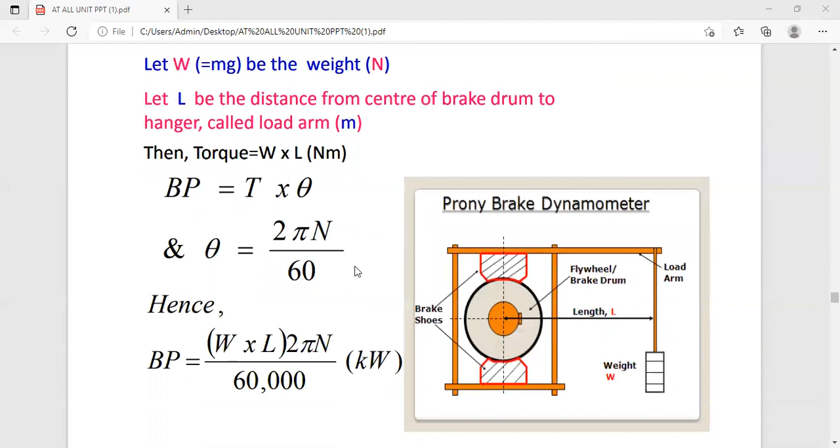When we calculate the brake power for the prony brake dynamometer, we take W equal to mg, where m is the mass on the load arm and g is the acceleration due to gravity. Let L be the distance from the center of the brake drum to the hanger, which is called the load arm.

So torque is equal to W into L. Keep in mind, W is the weight on the hanger in Newtons, and we calculate the torque as W into L, which is in Newton meters.

Brake power is equal to T into theta, where theta is 2 pi N divided by 60. So the overall formula for brake power is 2 pi N T divided by 60,000, where torque T is equal to W into L.

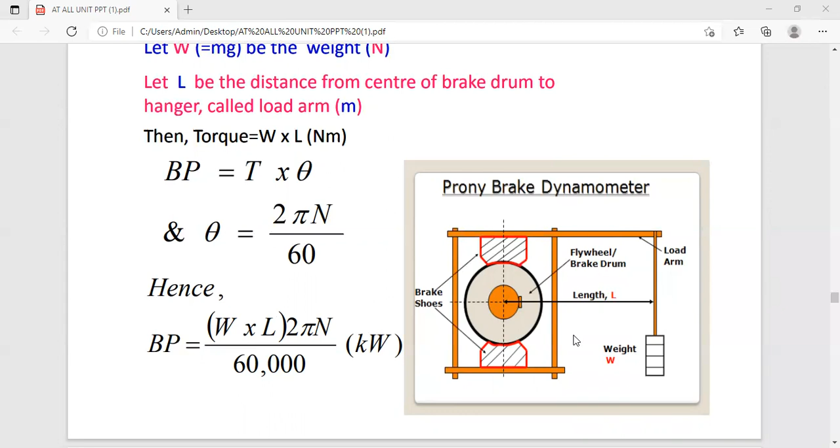W is the weight on the hanger, and L is the distance from the center of the flywheel to the load arm. In this way, we calculate the brake power using the prony brake dynamometer.

Next, we discuss the methods for calculating friction power. The difference between the indicated power and the brake power is called friction power, which includes pumping losses due to induction and exhaust, frictional losses in bearings and other moving parts, air friction of the flywheel, and power required to drive auxiliaries such as the governor, lubricating pump, and water circulating pump. So friction power equals indicated power minus brake power.

What effects can we observe due to this friction power? Frictional losses play an important role in deciding the performance and design of the engine.

As frictional losses increase, they reduce the availability of power output, increase the cooling load capacity since frictional power is converted into heat which is partly carried away by the cooling system and partly remains in the exhaust gases, increase the brake specific fuel consumption (BSFC), and decrease the mechanical efficiency. These are the effects of frictional power on IC engine performance.

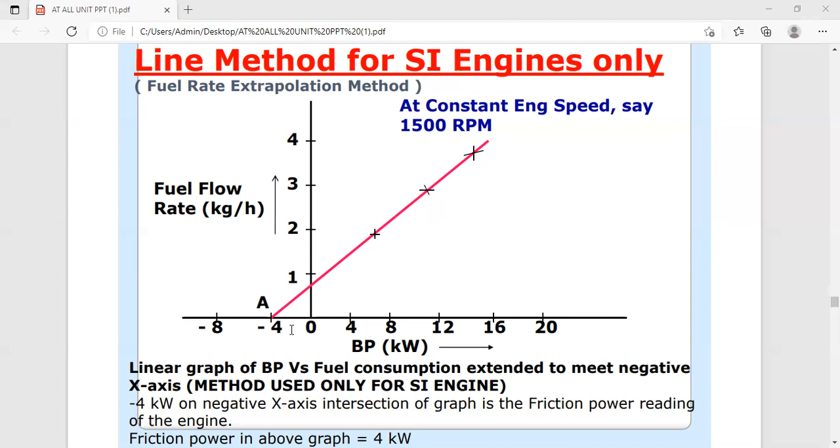When BP is equal to zero, the fuel consumption at this point represents the fuel consumed to overcome the frictional power. Since the variation in fuel consumption rate with brake power is linear, as observed in this graph, the extrapolation of the almost straight line part of the curve as a negative intercept on the x-axis, at zero fuel consumption, represents the friction power. In this graph, 0 to -4, so 4 kilowatt power is known as the friction power.

Now the limitations of this method: it is only applicable for the SI engine, meaning spark ignition engine. The engine must run at constant speed throughout the test performance, since friction power varies with increase in speed, so constant speed is required. This method gives only approximate friction power due to errors involved in the extrapolation method.

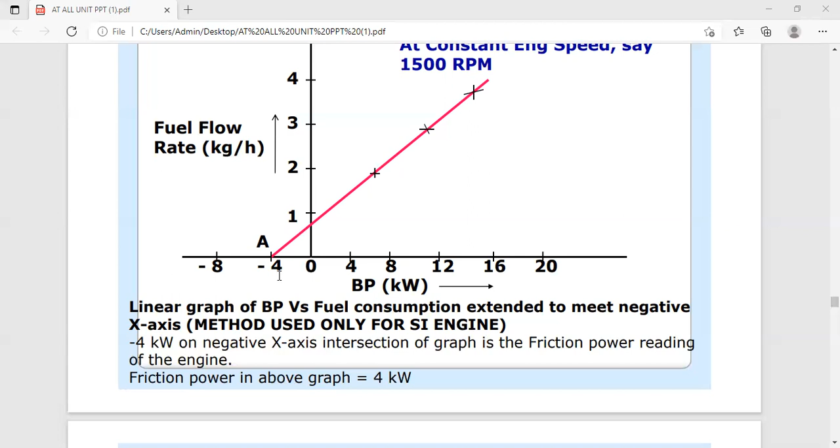So we have discussed the Willan's line method and its limitations. Next method we are going to discuss is the Morse test.

In the Morse test, the test can be used for determining the indicated power or the frictional power in case of a multi-cylinder engine, by cutting off each cylinder in turns. In case of a petrol engine, or SI engine, each cylinder in turn is rendered inoperative by shorting the spark plug of the cylinder.

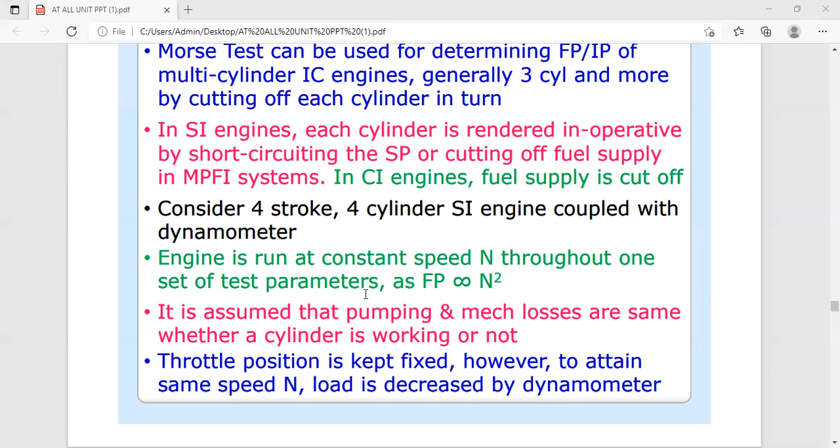In case of the CI engine, we cut off the fuel supply. Keep in mind, in SI engine we make the spark plug inoperative, and in case of CI engine, we just cut off the fuel supply to the engine.

In this engine, we take B as the brake power of the engine when all 4 cylinders are working, B1 is the brake power when the first cylinder is cut off, B2 is the brake power when the second cylinder is cut off, B3 is the brake power when the third cylinder is cut off, and B4 is the brake power when the fourth cylinder is cut off.

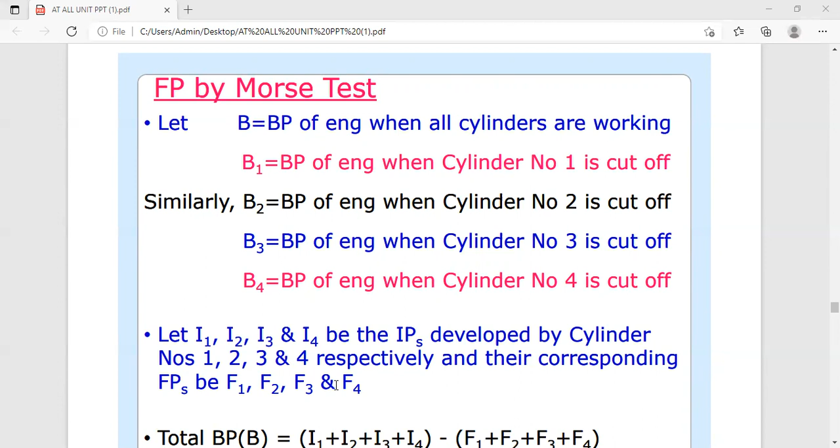I1, I2, I3, I4 indicate the indicated power developed by cylinder number 1, number 2, number 3, and number 4 respectively, when these 4 cylinders are cut off respectively. So the frictional power we consider as F1, F2, F3 and F4.

So total brake power - how we are going to calculate this total brake power is important. Total brake power is the summation of the indicated power minus the summation of the friction power.

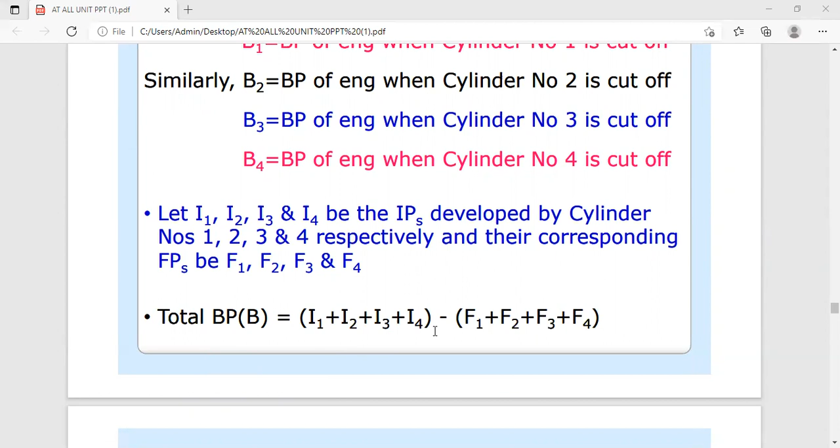And in this method, we are calculating B1. How do we calculate this B1? B1 is when the first engine cylinder is cut off, and at that time the remaining cylinders are running.

So we are taking I2 plus I3 plus I4, the indicated power of the second, third and fourth cylinders, and adding those. Then we subtract the frictional power, because frictional power is the same, so F1 plus F2 plus F3 plus F4. We take the difference between these two and we get B1.

So we have calculated the total brake power, and we have calculated the brake power when the first cylinder is cut off. Subtracting the total brake power minus the brake power when the first cylinder is cut off gives you the indicated power of the first cylinder.

In this way, we can calculate I2, that is B minus B2 when the second cylinder is cut off. Similarly we can calculate I3 when the third cylinder is cut off, B minus B3, and I4 when the fourth cylinder is cut off, B minus B4.

By adding all these I1, I2, I3, I4, the indicated power of the first, second, third and fourth cylinders, we get the total indicated power. In short, we can say the total indicated power equals four times B minus the summation of B1 plus B2 plus B3 plus B4.

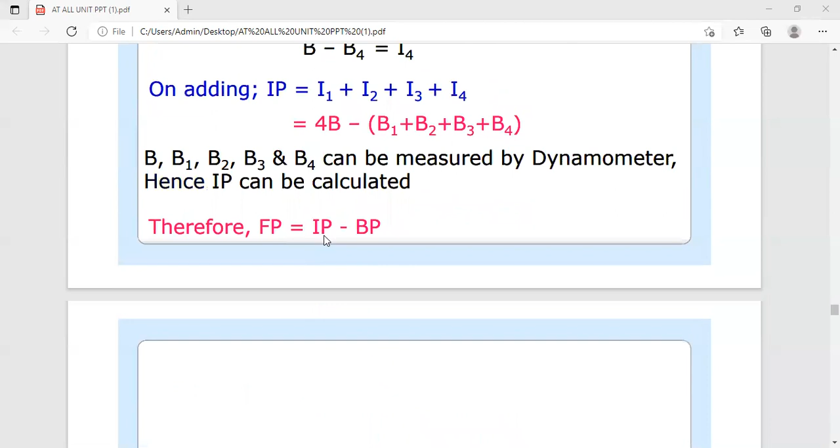So in this way, we can calculate the friction power by using the Morse test. Now let's look at the errors involved while calculating the friction power using the Morse test.

We know that the measurement of friction power is fairly accurate. However, errors are involved in these methods. In the case of petrol engines, using a common intake manifold may affect the distribution of the mixture and the volumetric efficiency of the engine cylinder. Also, the use of a common exhaust manifold when cutting off a cylinder may cause pulsation in the exhaust system, which in turn affects the performance of the engine.

So in this way, we have discussed the Morse test. This is all about today's lecture.

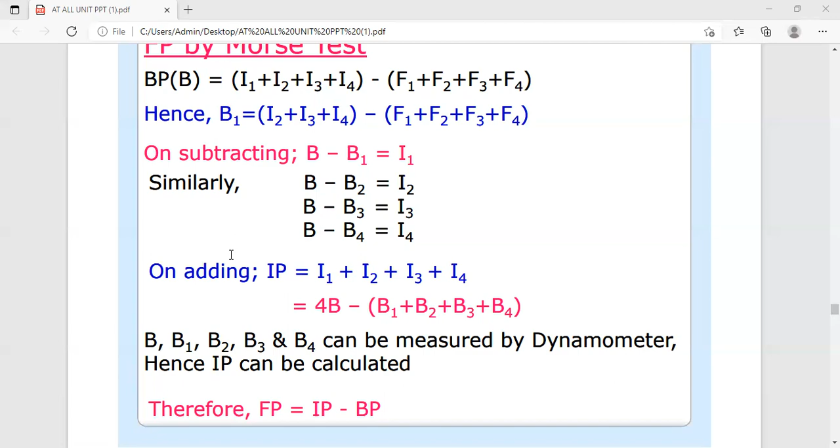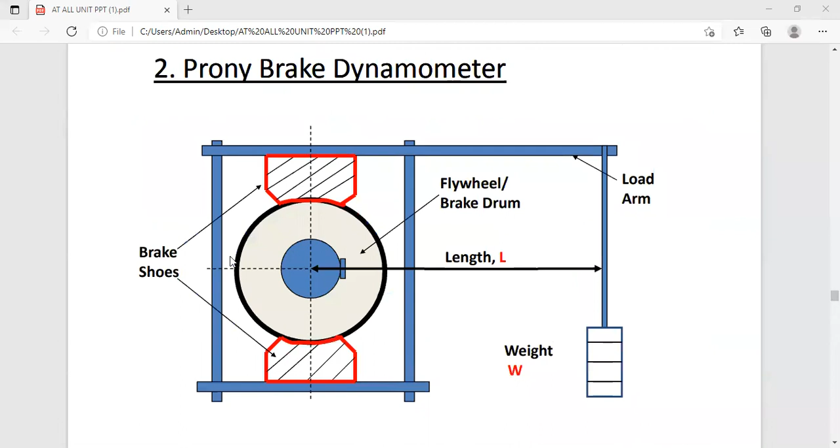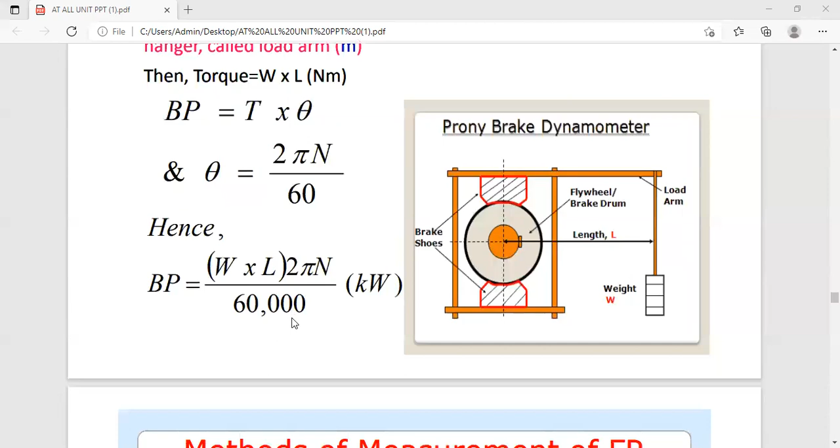In today's lecture, we discussed different methods to calculate the brake power, such as the Prony brake dynamometer. In the Prony brake dynamometer, we calculated brake power equals W into L into 2 pi N divided by 60,000. Next we discussed the methods to calculate friction power.

In the friction power method, we discussed measurement by indicated power minus brake power, the Willan's line method, the Morse test, and the motoring test.

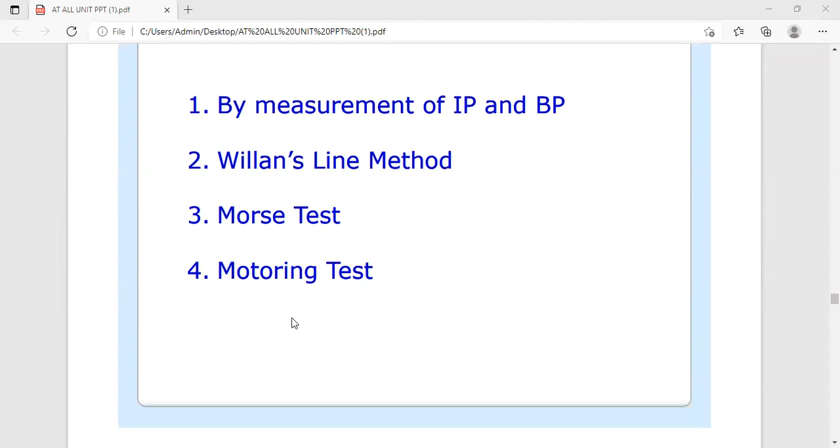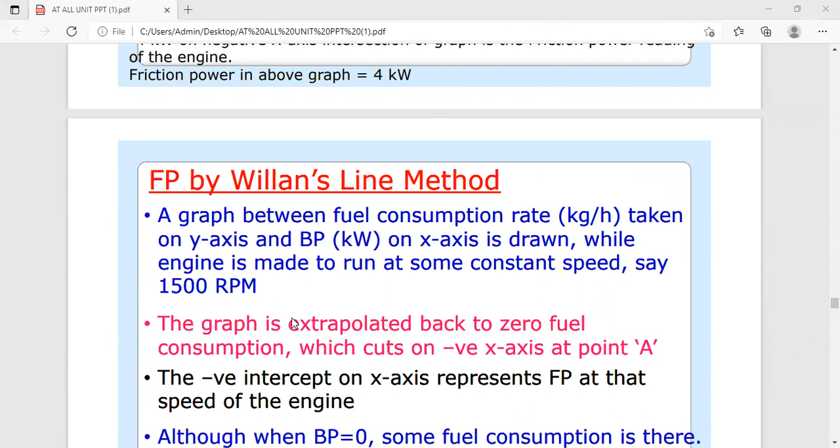Regarding the motoring test, the frictional power is determined as follows: the engine runs up to its rated power until steady state conditions are reached, and the power developed by the engine is absorbed by the swinging field dynamometer connected to the engine shaft, either through the ignition of the petrol engine or the fuel supply of the diesel engine being cut off.

In both cases we consider cutoff, and by suitable changes in the electric switching devices, the dynamometer runs as a motor at the same speed at which the engine was run. The output of the motor is measured, representing the frictional power. In order to maintain the operating temperature, the cooling water cutoff is taken during the test.

So this is all about today's lecture. Thank you very much.